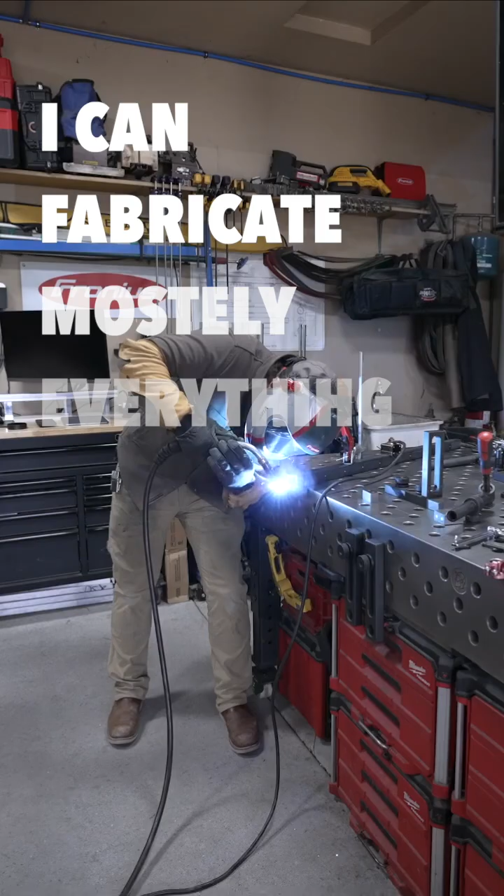This eliminates the need for me to be in the field. I now have completely accurate models. I can fabricate mostly everything in the shop and then install it. Out of Aspen, Colorado, Aaron at West Weld made the leap from manual measuring to digital. With SPEEDtemplate and the Leica X6, he's transformed how he measures, fabricates, and installs.

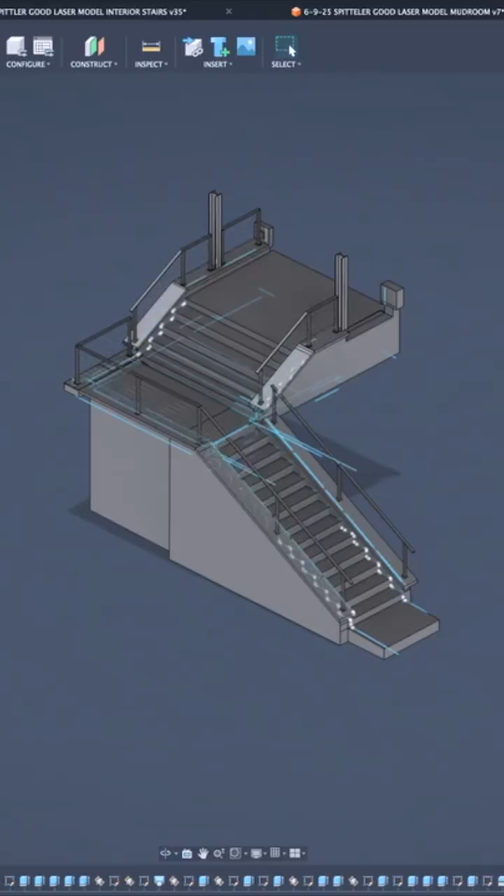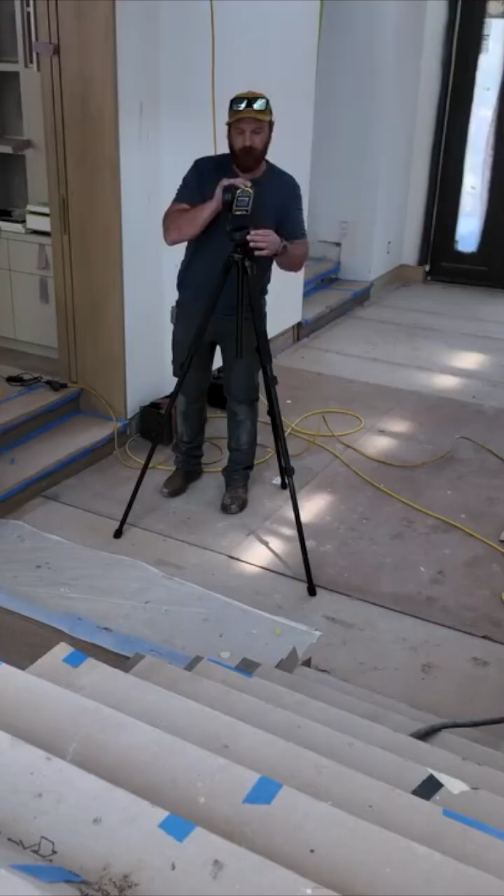I built these stairs not too long ago, and I'm going to show you guys how I measured to put handrail on them. I'm using the Leica X6 with the software called SPEEDtemplate, and I'm shooting the points that I need with the laser, and the software records it for me. I did this for 5 separate flights of stairs on this job, and this is by far the biggest job that I've used this laser on.

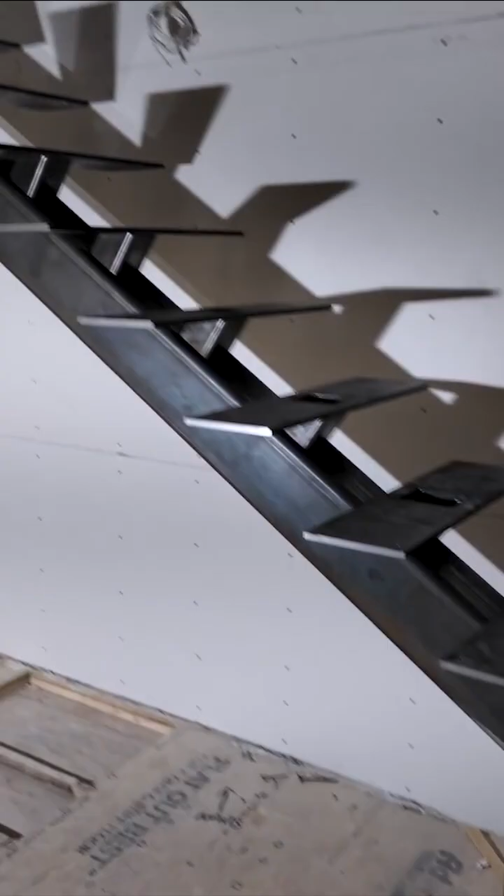These are what the scans look like before I export them to Fusion 360 and stitch them together. This is what they look like after I put them into Fusion 360 and put them where I think they need to be. I posted some videos not too long ago about some projects I did. These sets of stairs, this other set of stairs, and this handrail. Something I didn't mention in those videos is I used this laser for all 3 of these. I wanted to test it before I told you guys about it.

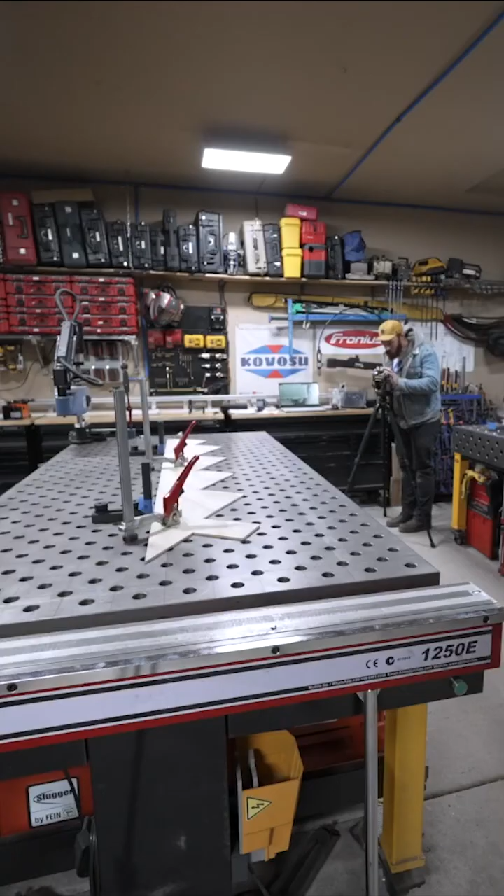And this handrail in particular, this is the first powder coated handrail that I've ever installed without test fitting first. It fit perfectly. These are some wood templates out of plywood that I need to get in the computer so I can have them laser cut.

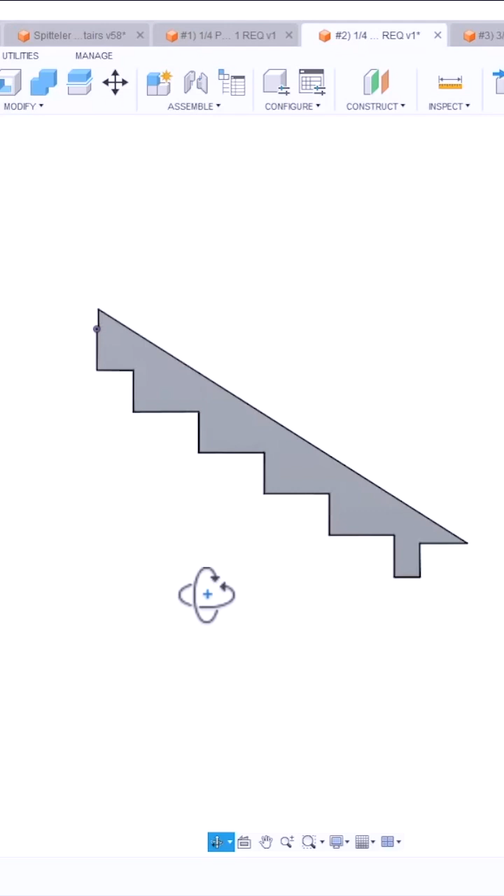Basically, you level the laser and then you start shooting points. And every 2 points, depending on what you tell the software, it connects a line. It makes a line. You can do this in 2D or you can do it in 3D. You just tell it which plane to draw on. After you have your wireframe model, you can export it as a DXF and then bring it into whatever CAD software you already use. This is also really affordable if you compare it to like a LiDAR scanner.

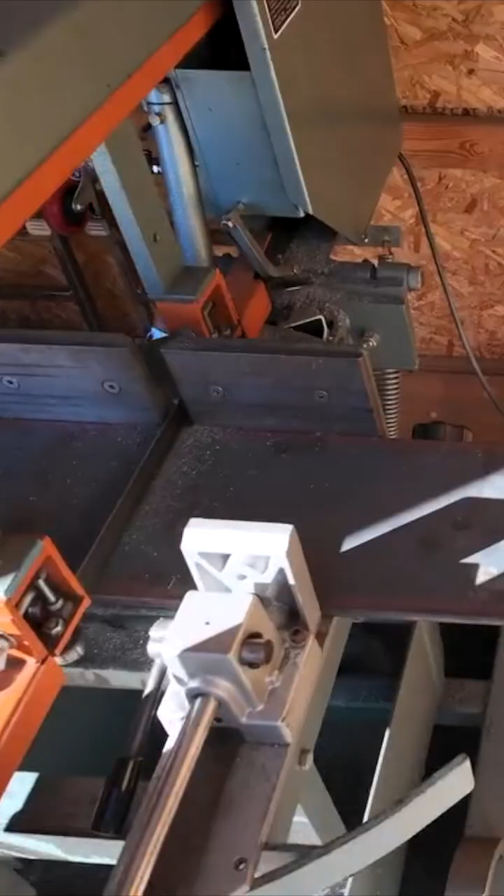Basically what the laser does is it measures points, but this software almost works as a standalone CAD program and it connects the dots. You can basically shoot all the points and elevations you need in the field, and SPEEDtemplate will connect those lines and create kind of like a wireframe model that you can export as a DXF, and then you can import it into your regular CAD software like Fusion 360 or whatever you use.

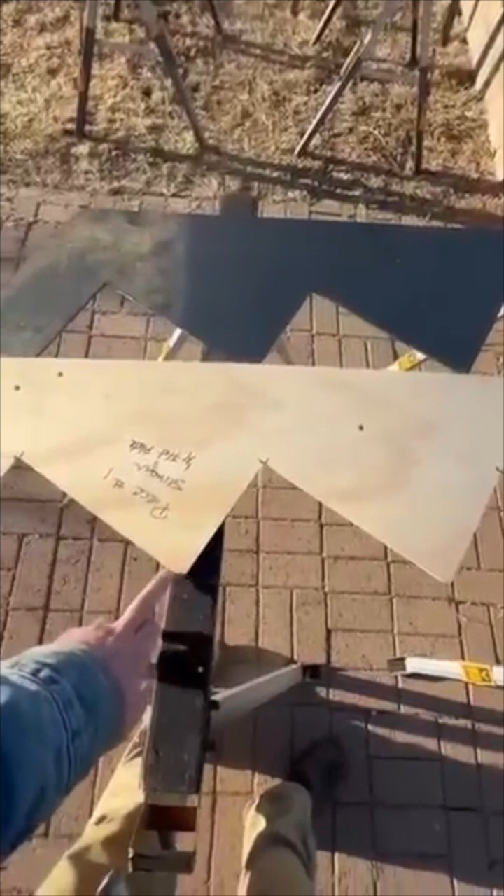I don't get wood templates a lot, but it can be problematic sometimes to measure these by hand because you could get compounding errors. Like let's say this is 89.5 and you enter it as 90 degrees. And this one's like 90.5 or 2 or something. By the time you get to the end, you could be off a little bit. So it's not a primary use I use the laser for, but it's still super helpful.

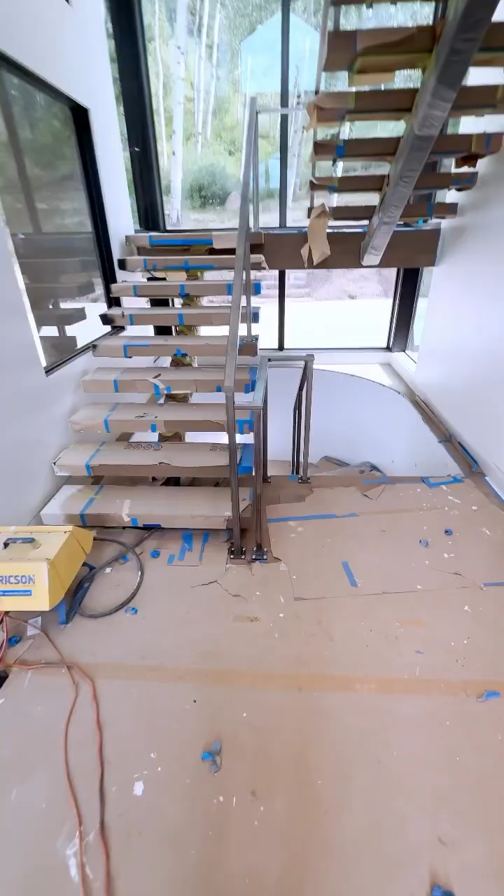Me and my brother have been installing this cable rail on the set of stairs we built. And it's nothing too crazy. It's a pretty simple cable rail. There's a big difference on this job, and that's that I haven't done any welds in the field at all. There's still some joints that have to be welded and finished in the field, but it's very few, like a couple. And on a set of stairs like this, that's pretty rare. And it's because of that Leica laser and the SPEEDtemplate software.

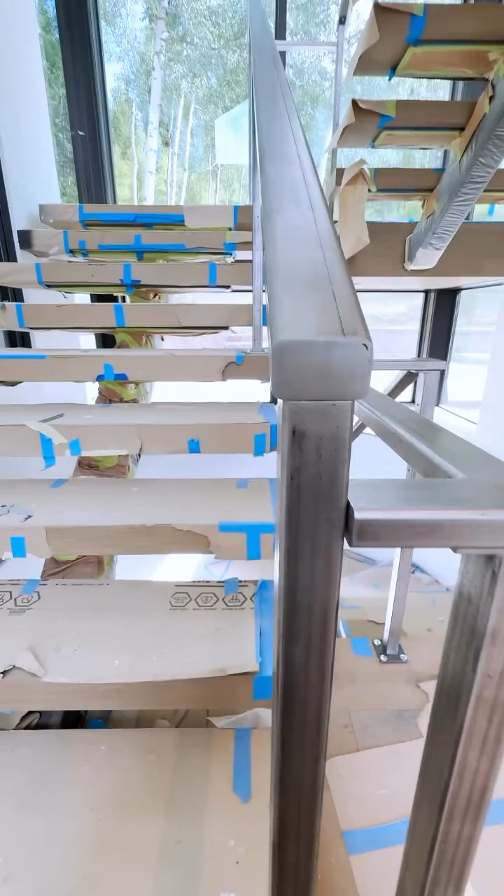And this is the first really large job that I came out. I spent a lot of time shooting a lot of points, and I put it in CAD, built the models, and everything fit so perfectly, it even surprised me. And I know this technology isn't new. LiDAR scanners have been out for a long time, but the cost of this is what surprises me so much. I think it's $300 a month.

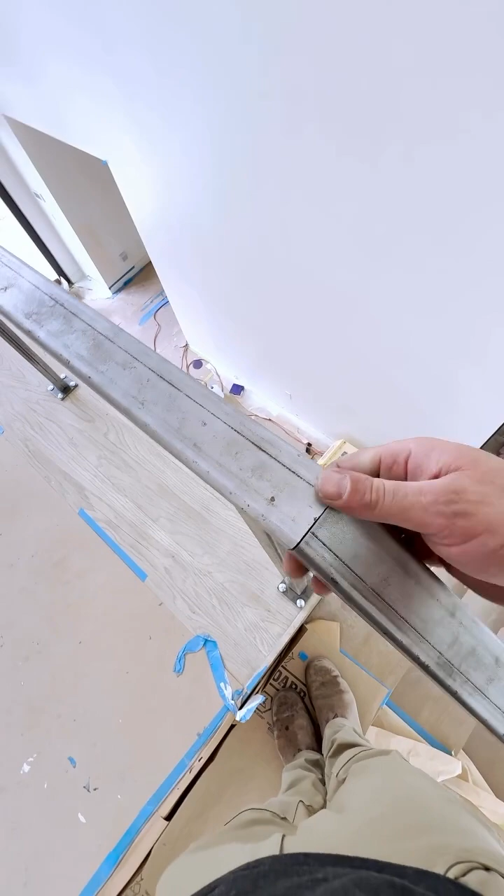Generally, when I do a cable rail, there's a lot more field work. I weld the posts to the base plates and run the posts long, and then I bring them out and install them, and then use a long straight edge and scribe them, and take them back to the shop, cut them, drill the holes. There's a lot of back and forth between the shop work and the field work. And to just be able to come out, measure it once, build pretty much everything in the shop, everything that's easy to transport, and then have everything fit is just crazy to me. It's completely different than anything I've ever done.

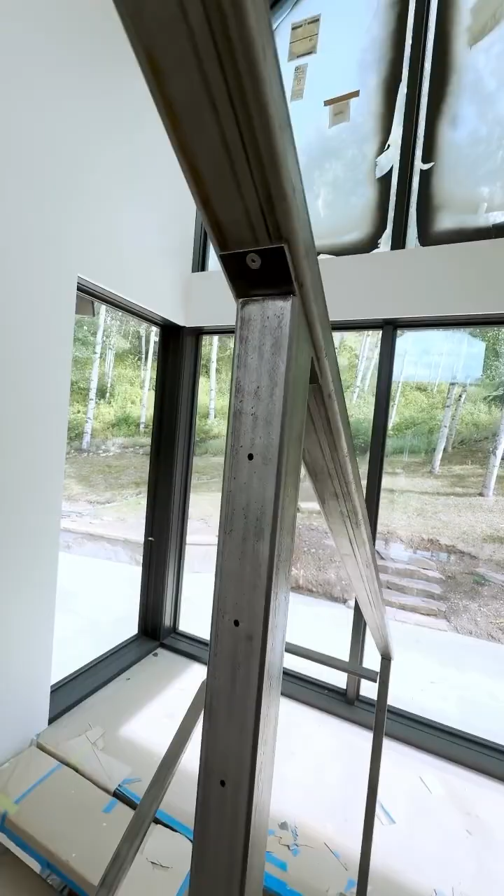They're going to paint this black, but I still wanted to make sure everything lined up, especially the cables and all the hardware. I have, I don't know, another couple 100 feet on other parts of the house to do, but this is a really good start. It gives me a lot of faith in that machine that I didn't really have yet because it's still pretty new to me.